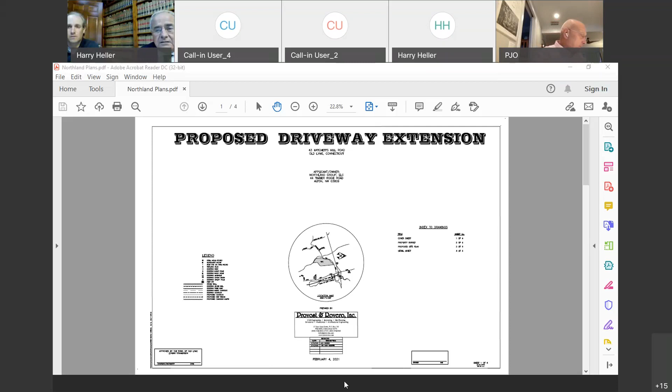Wait, I think that's up to Dan. Do we have privilege to screen share, Dan? Yes, you do. I don't know where your plan is located. It's on my desktop, so let's do this. I'm going to minimize the commission. Can you still hear me? Yes, we can. Well, I think we have to go back - can we load that up again so you can screen share? Okay, does everyone see it? Do you have the plan up on the screen? Yes, and we're getting a lot of feedback. Harry, your audio is showing up twice. Can you hear me now? No. Do you have the ability to mute one of them? I did mute one of them, let me try muting the other one. Is this any better? Can't hear him at all. Well, maybe you gotta unmute yourself. How about now, can you hear me now? Yes, still getting some feedback. Can you say something now, Harry? How is this, good? No, I'm still getting feedback. Paul, we start muting your phone when you're not speaking - that might be part of it, because your computer audio might be picking it up now.

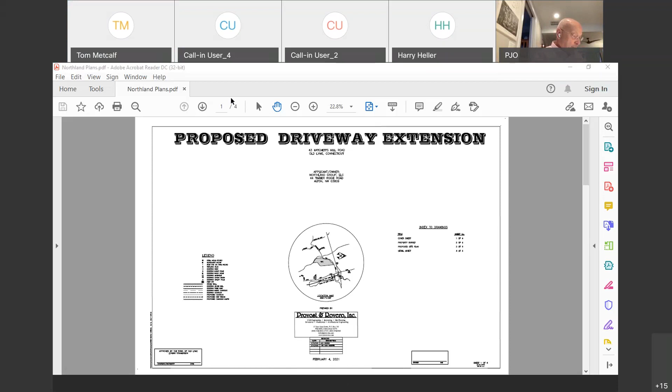How's that? Good, not good. We're logged in twice or something. Try now, Harry, I think I found the problem. Is that any better? No, I don't know why you're getting so much. I've muted Paul, I'll try muting everybody and see what happens. Why don't I call in on the phone? Yeah, it's definitely you, Harry, because I've muted everyone but you. You think you can? You know how to do it? No. Yes, we can do that twice.

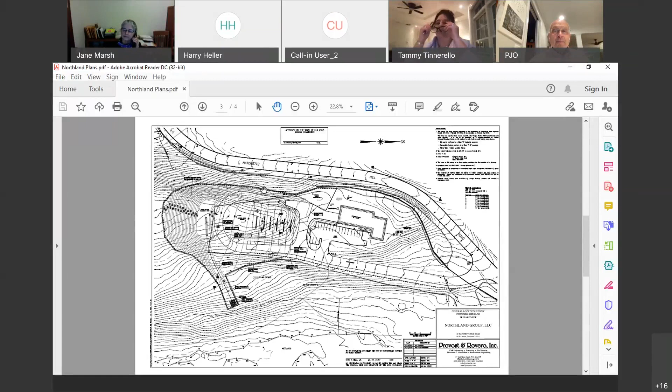Did anybody hear me on that? Yeah, Tom's muted right now. I requested him to unmute himself. Okay, Tom, if you're on your phone, press star six. Okay, can you hear me now? Yes, now we can hear you. Yes. Okay.

To provide a loop driveway and an area for parking, I don't believe you would need to remove that amount of material. In consideration of the future development of the property, I can certainly see the need to remove the material. So I'm going back to, standing by what I said initially: if it's just solely to provide a loop driveway and the added parking, it wouldn't be necessary to remove that much material.

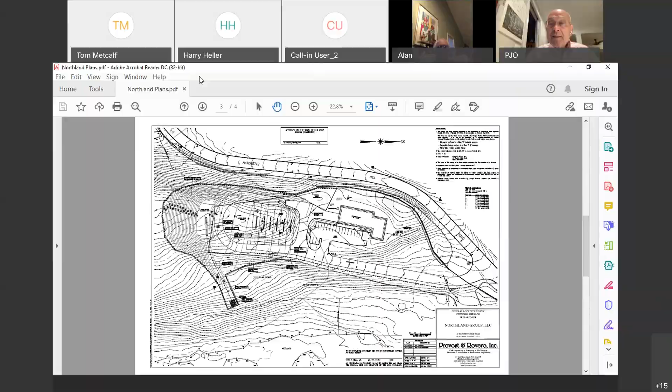Take a motion to close this public hearing. I would so move. Alan, second. I'll second. Do I have a second? Tammy, was that you? Yeah, it was me. Okay, now I can see everyone once again.

Okay, Tammy second. All in favor? Aye. Aye. Aye. Opposed? Abstained? Okay, the motion to close the public hearing on 43 Hatchetts Hill Road is approved 5-0-0.

Okay, let's move on to our second agenda item, which we've amended in. And that is the possibility of establishing a moratorium on new development on Halls Road pending finalization of the master plan, which is underway right now.

One of the questions I had was with the potential of another gas station being on Halls Road, separated from another gas station by an antique shop. And further, it appears as if Tesla has been watching our meetings over the last couple of years, and Tesla has now indicated it would like to once again make application for the establishment of a charging facility in the marketplace shopping area.

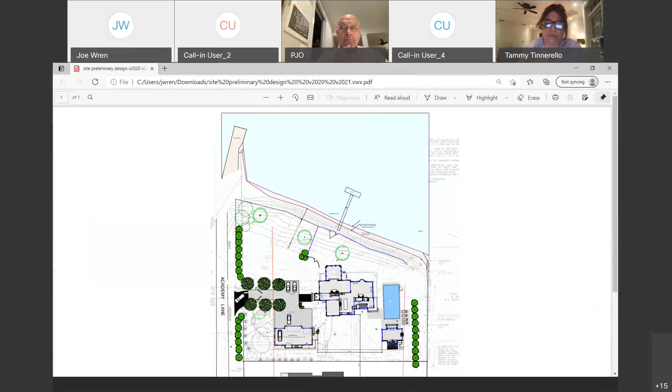Can you all see my screen? Yes. Okay, so there was an elevation view from the river as well, but this is the site plan, one of the items the architect prepared for Gateway. You can see the greenery along Academy Lane, and the trees in the driveway. There's now another row of trees along the east side.

And also this row of trees along the north side. The existing garage was down in this corner, right on the property lines, until recently — that has since been removed. The pool house is here. You can see the footprint is approximately the same, maybe a little less, and it was shifted a little south.

As Dan mentioned, from a lot of view lines coming from the river in these directions, you don't even really see the pool house until you get to this very short window right here, where you're looking straight into the property and see the small pool house. Over here is the carriage house that we talked about, and that's more than 100 feet.

The addition on the main house — there's a small addition here, obviously on the backside, you can't see it. The bigger addition is on the water side, but there's no added bulk because the roof line is lower than the existing, and it's framed by the existing bulk of the house on both the right and left sides.

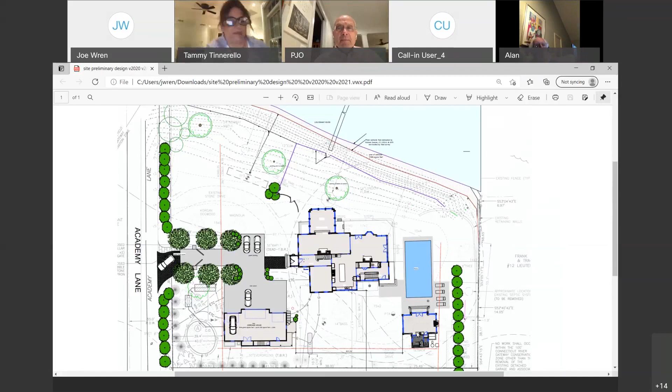All right, I just got something from Tammy indicating she might have a picture from the river. Tammy, please. I do, but I don't know how to share it on the screen. I think it will show Jane the trees and the tree line. Tammy, this is Joe Wren, thank you. Down at the bottom of your screen there should be a share tab.

Let me see what it says here. Tammy, do you have this on your desktop? I'm on a Mac, yeah. Do you have the picture there? Share it from there. I can share it from here. If you have the picture on the Mac and you've got the share button on the bottom, you should get the picture up.

Do you want to email that to me, Joe? Have you contacted the architect at this point? I am texting him and calling him as we speak. Okay, Tammy, why don't you try to email that to me, and I'll forward it to Joe. All right, I just sent it to you.

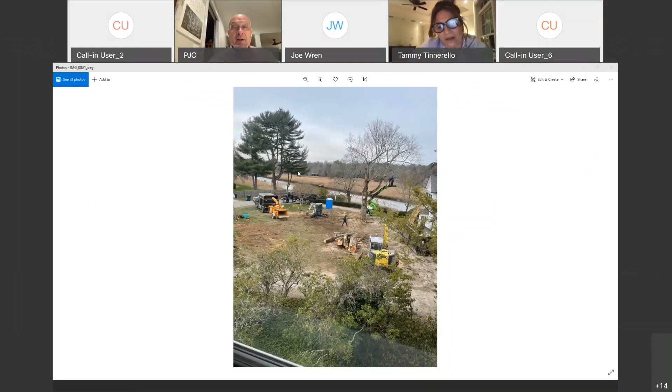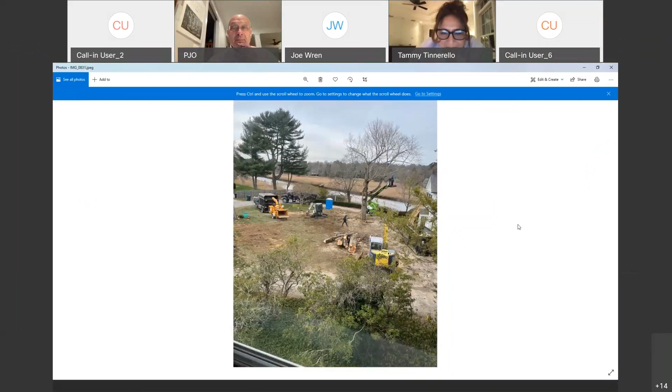It's all coming together. Where's that? Here we go. I'm working on it, first time for everything. Looks good, hey, we got a picture. Can you enlarge that? I guess I'll take that as a no. This is all very new to me. Here we go, is that better? Yes. Zooming in for you guys? Oh, perfect.

There you go. So Tammy, do you want to narrate this for us, please, as to where this is? So this is on the riverside. So that's what you can see is the river, and those were what Jane was looking for, to see if there was any kind of buffer.

Now, is this the property we're talking about? Yes. This is Joe Wren. So the trees and shrubs in the southwest corner that I had mentioned, those are all these trees here. Then one of the trees you saw on the site plan is here, the other one is here, and the other is out of view to the right. This tree here was in the process of coming down, they were limbing it. This was one of the ones removed, should be replaced with new trees along the new driveway.

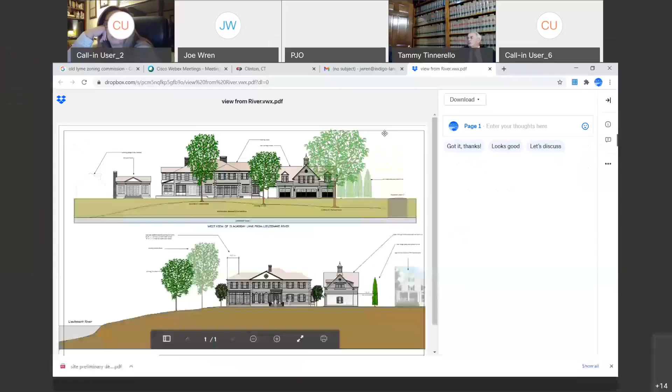I am starting to get something in my email that may help you. Let me go there. I apologize. It's okay, no worries. Okay, here we go. Tammy, Dan, if you could unshare, I'm going to share what I have. They just sent me a Dropbox file, and this will help. Sorry, this is also on me for some reason. This is not all Joe. If Joe provided this and we didn't get this to the commission, that's on me. Jane? Yep. Okay.

Can you all see my screen? So the head-on shot right there with those three trees - I can see the carriage house on the right, and the left is the main building with the addition. You see the light blue at the bottom labeled Lieutenant River. So this is the view from the Lieutenant River straight on.

So we have these three existing mature trees that are remaining. These are the trees along the driveway we discussed. This is the carriage house, already approved by zoning, not part of this application. This frame is the main house. This here is the addition. Coming straight out, looking straight on, it doesn't add any visual bulk, as Gateway said.

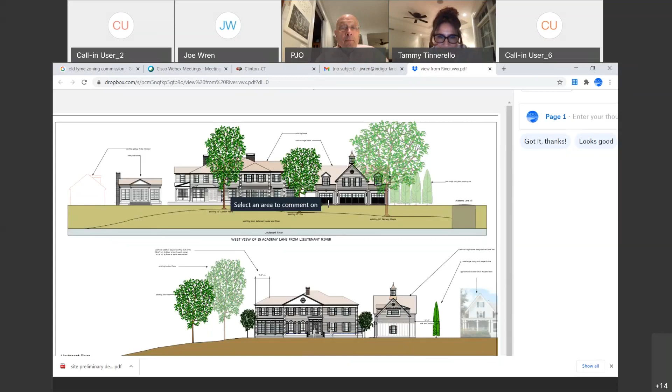This was the former garage that was recently taken down. And this is the pool house. Now, all of this is to scale. I could blow it up also. So you can see how it is, and you can see that it's very pretty to look at, all similar and matching architecture.

The garage that came down was an older barn - I think you were just looking at a flat side of the barn. So much more aesthetic now. And the pool house is a little further set back and a little to the south. So from more angles from the south along the river, you see less and less of that. And as Dan said before, it's lower than the house, and on many angles from downriver it's blocked by the house.

And the pool is directly in front of that. Pool is directly in front of this, yeah.

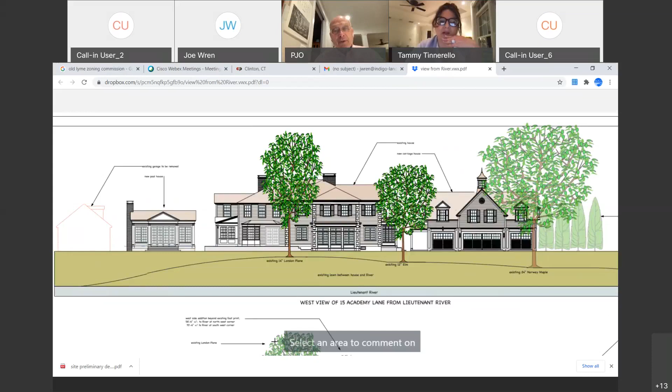And one more tree to the left of that, by the middle of the house, wouldn't that balance it a little better? If that's a condition you would like, I haven't discussed that with the owner, but if that is a recommendation and condition of the commission, we will make that work. I'm just looking at the symmetry of the property, and it kind of looks like there's something missing on the left-hand side - like maybe to block off that pool house a little, or just put something, a larger tree there, which would give us nice continuity across. Any comment on that?

There is a curved retaining wall in this area, so obviously we can't plant on the retaining wall, but if we put it somewhere down in this area, like a birch as mentioned before, we can certainly add that - a nice 3 or 4, kind of like a birch to do its thing. This is the idea.

This is the idea of what I think we're supposed to do, which is look at it from a vegetation standpoint and see if it breaks it up enough so the eye sees more vegetation and less house bulk, so the house blends into its environment instead of the other way around. So adding another tree, maybe something a little lower, just to break up that long, flat house. It's something that shouldn't disturb the property owners, since they have all the rest of it to look out on.

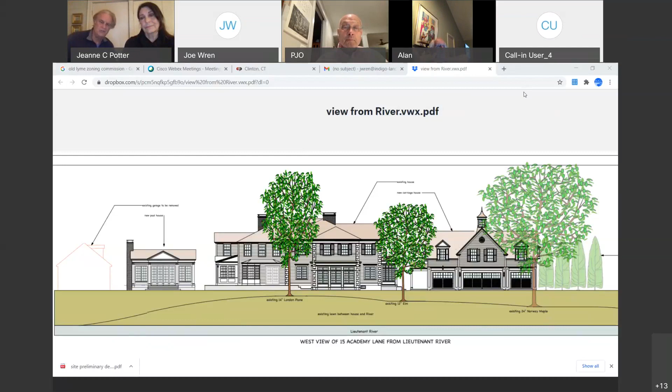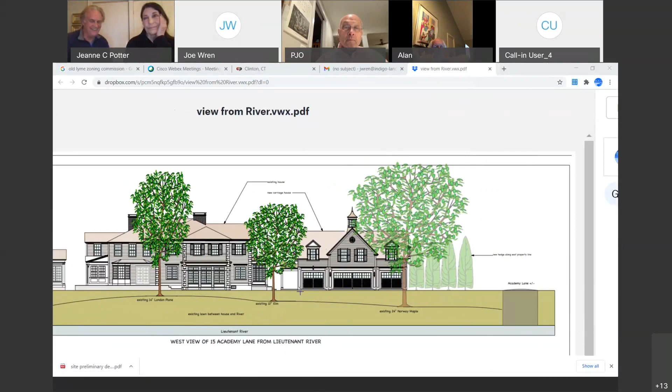I applaud Jane's queries as to how this looks from the Lieutenant River, which is the historic integrity of our village. But I only heard one commissioner's comment saying that's a really big carriage house, and you can see it proportionally to the main house. You're hearing probably some dismay by neighbors a block away as to how such big, overbearing structures get built in the middle of our village. Just come to it from the east, walking west down Academy Lane to the river, and it is a visual gobsmack. It's quite pretty, quite architecturally lovely with the gazebos and all that, but again, you're hearing some real frustration with how something that big gets approved and lands in the middle of one of the most beautiful historic parts of our village. I'm surprised there wasn't some pushback on that, or perhaps there was and I didn't know about it.

Mr. Chairman, this is Joe Wren, if I may. I appreciate the comments, but all the comments are about the carriage house, which is not part of this application. The carriage house meets and exceeds your current zoning regulations. That's why Dan was able to approve a zoning compliance permit for that, and the health district approved it as well. The setback I mentioned is the 100 feet from the coastal resource. We're not supposed to be 100 feet from a property line — we are the proper distance, and even a little more, from the setbacks from the neighbors' property lines per the current zoning regulations. And as I mentioned before, we're actually a little further from Academy Lane than other houses are, because it's a narrow street setback, and we're also conforming to that as well.

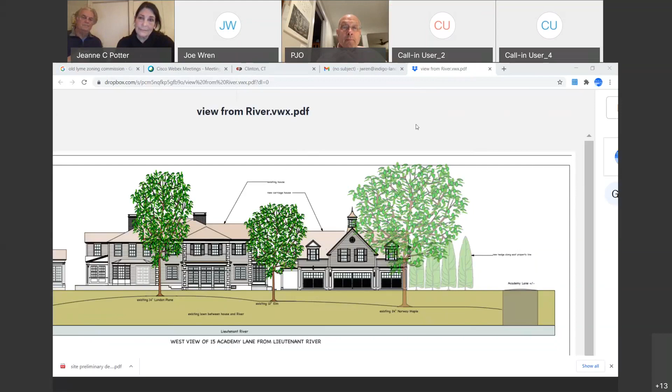So just to speak to that point, I'm Dan Beret, the land use coordinator who approved that. The historic district in Old Lyme does serve a function like that, it's just this property doesn't fall within the historic district. The historic district is strictly along Lyme Street and, I believe, a 200-foot buffer, so unfortunately this falls outside it. If this were part of the historic district, it would have gone to the commission for a certificate of appropriateness. I don't know whether the size of a building is within their legislative mandate to control, but certainly they would speak to how it looks. I'm also not certain a design board for architectural purposes would have prevented this, because of its large bulk along the road. I know that's not pleasing for your walks, but I'd be happy to speak with you in the future about advocating for a commission that may meet some of your concerns.

Thank you, Dan, I appreciate that. I think if you're saying that's outside the requisites of the historic district, it does still have an impact on the historic integrity of the Old Lyme Village. So I think you may be hearing that the architectural review and the zoning review really do have to be in sync when there's a contiguous property on the historic village area. And it's not just for our walks, it's for the people and neighbors who live here in the historic village of Old Lyme that we all cherish, and for our future. These kinds of precedents, where overbuilt structures happen — maybe down in Lower Fairfield County in Greenwich, but this is where we used to live, so we've seen a lot of that.

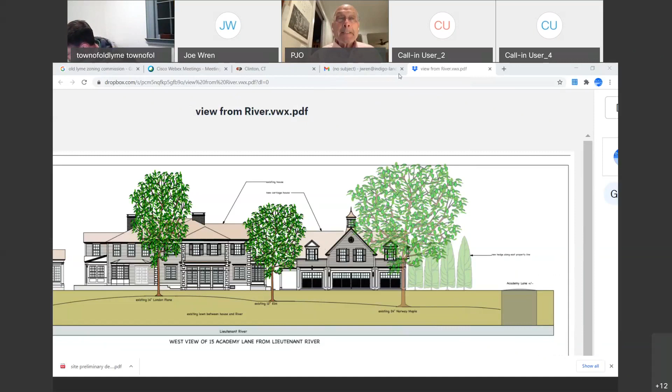I am. Silence is golden, so I will take a motion to close the public hearing on the special permit for 15 Academy Lane. So moved. Jane Marsh, motion. Second. Mr. Miller, all in favor? Aye, aye, aye, aye. Opposed or abstained? Motion passes 5-0-0.

Well, that appears as if we have completed and closed all the public hearings. Now we shall move on to the regular meeting.

Special permit modification to cut and fill property to allow construction of an extended loop driveway on property located at 43 Hatchets Hill Road, Northland Group LLC, applicant.

What are our thoughts on that? I think there are some conditions. First off, is there anyone that's really vehemently against this project? Okay, so that being said, I think it's a project worthy of consideration. We do have some conditions that have been noted either by Tom or the applicant as well. So are we prepared to make a motion for approval with conditions and note those conditions?